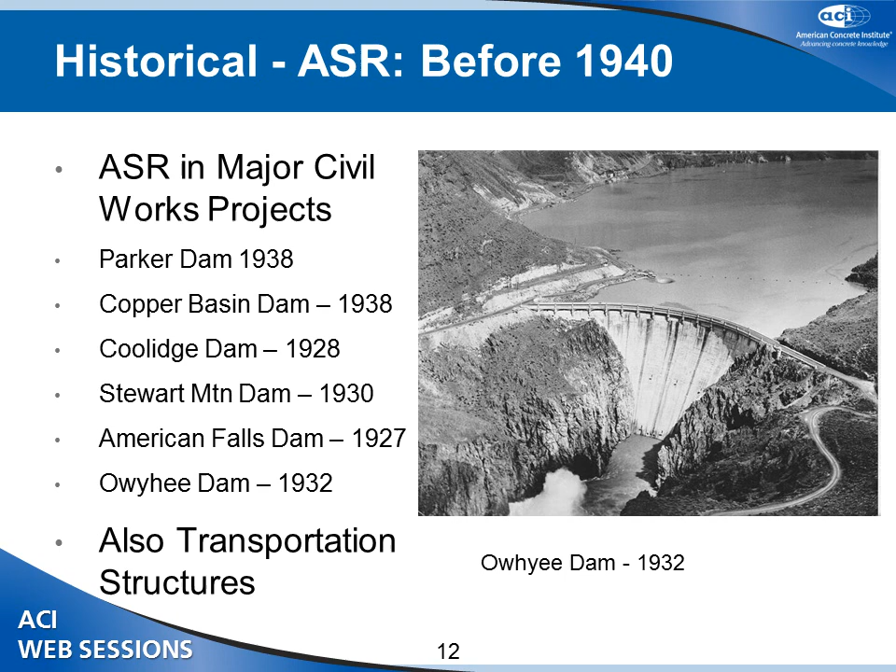Just a little bit of background. Jim Pierce is back there, and he's quite a bit older than I am, so he might have a little more perspective. These structures listed over here are mostly Bureau of Reclamation structures. A lot of public works in the 1920s and 30s turned out to have some kind of alkali-aggregate reaction, and also some transportation structures in those days. And people didn't understand it. As most of you who know about this subject know, Stanton published the first work on this in, I think, about 1940. And very quickly thereafter they identified alkalis in cement as a major feature.

If you look around the older literature, you'll find these kinds of graphs that show alkali content in cement and expansion. And interestingly, they all have sort of the same quality. It shows essentially no expansion up to about 0.4 alkali. Then they have a fairly steep ramp up to about 0.8 alkali. Then they kind of bend over. And a lot of them show this sort of very high alkali decline. Nobody ever makes anything out of that.

I first saw, well, given the size of the error bars, maybe that's just random error, but I've seen it on several other sets of data too, and I don't know if we need to make it. It's very rare for cement to have alkali contents higher than 1.2%, but it's kind of a curiosity.

But fairly quickly, the alkali content of cement became the major feature in the concept of mitigating alkali silica. We had some test methods in those days that you recognize if you work in this area because they're still there: the quick chemical method, the mortar-bar method, and the mortar-bar method modified for use with pyrex glass.

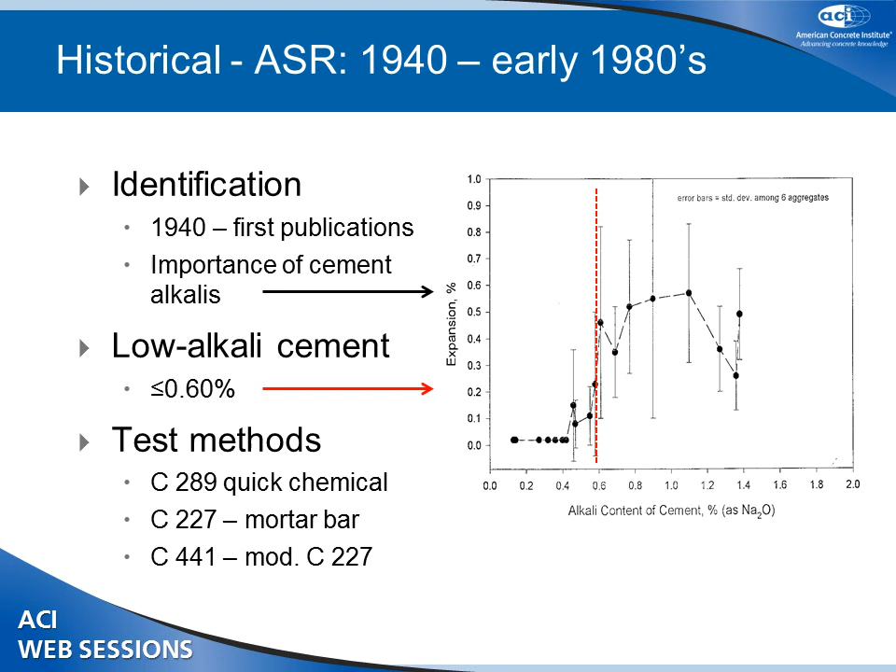In the 1980s, we used that guidance, low alkali cement. I remember when I first came to work for the Corps in 1980, and for a number of years thereafter, the rule was if you have low alkali cement, you don't worry about anything. You're covered. There's nothing else to do. And we built a lot of structures that way.

But looking in the older literature, people knew in the 1940s that pozzolans helped a lot. They also knew, as I showed in that graph, that low alkali cement wasn't always the answer. There's that business right in here. And we knew that. We just didn't implement it really. We just sort of saw the bigger part of this graph and went off and built the guidance around that.

And we paid some prices for that. I know the Corps has got some structures that are not doing too well these days that were built with that low alkali cement concept as the only variable.

So in the 1980s, improved test methods were developed. The now somewhat famous 1260 and 1293 and 1567 were all developed, I think, in the late 80s, and they were standardized in ASTM in the 90s and early 2000s. I think they're in the Canadian guidance a little earlier than that. We've had field service records around for a long time, and they've normally been held to be the gold standard, and I'll talk about that in a minute.

And now we are really moving along. We're developing a comprehensive concrete specification. One's already been put into the AASHTO literature through some federal highway work. And ASTM is working on a similar document. Our friend Jason Ideker is sitting down here, and he's chairing the group in ASTM that's working on that. And these things contain a lot of information and are really nice documents that are coming along.

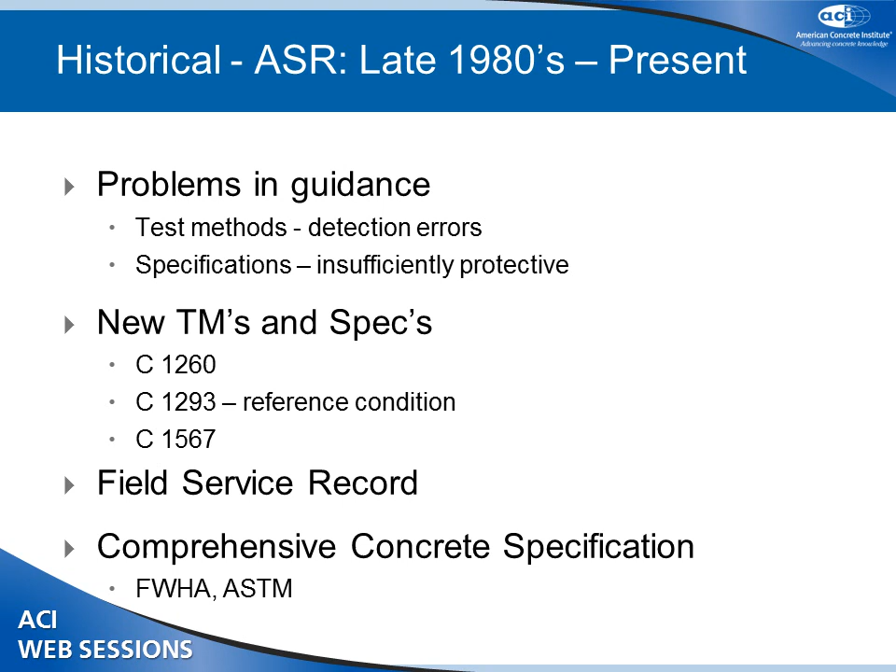And what maybe is coming new is this whole business. We used low alkali cement as sort of the reference condition for many years. And as I'll say in a minute, but I'll say it now and then say it again, right now we think that the concrete prism test, the 1293 test, is sort of our reference condition.

And nowadays people are doing things like taking big chunks of concrete and putting them outside. We've got some in Central Texas. The University of Texas has one, and I know Texas DOT is starting up some of this same kind of work. And there's some in Canada, and some in England, and there are various around. And this may, in the long run, be very helpful to us. I think it's already giving a lot of good data that'll help us make some progress on things that we have been either ignorant of or confused about.

Here's where I think one of the problems is: if you read all the information that's been developed in the last few years, you'll see quite a lot of detail and understanding there. In practice, however, it's rather common to just ignore all of that and run a 1260 test. If it doesn't do well, throw some fly ash or slag in and run the 1567, and if it meets the limit, you go. So many people skip what we consider the standard condition, which is the 1293, mostly just skip around that.

And in fact, sometimes we skip that one too, and we just go straight here. And in many applications, that tends to be the approach. And so the alkalis have been de-emphasized. We mostly rely on supplemental cementing materials, and people differ a little bit in how they use it. There's less than a tenth or less than or equal to a tenth, some differences there.

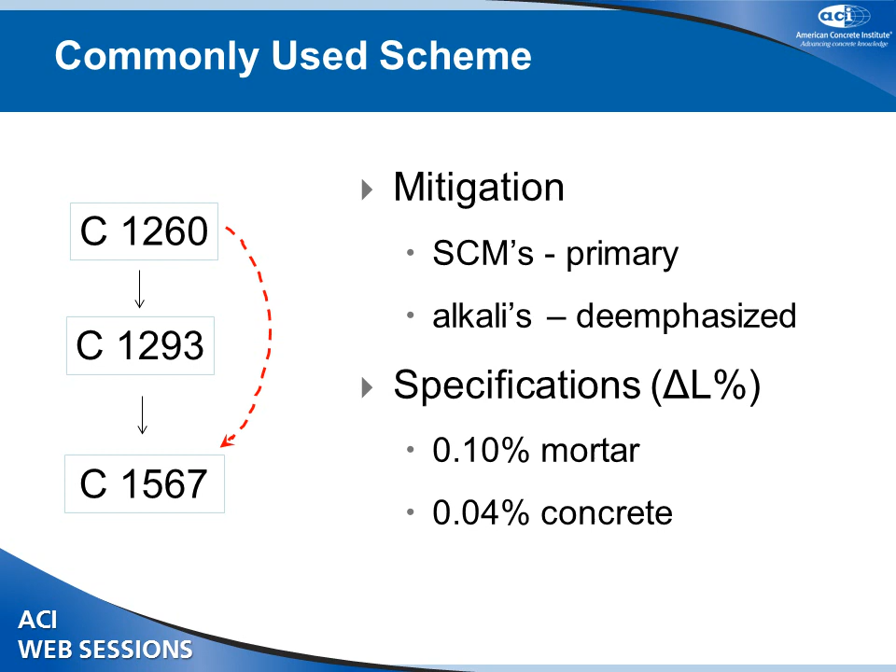Alkali-carbonate reaction has been a little bit of a neglected child, and that's because it's not as abundant, as common as alkali-silica reaction. It was identified in the 50s and 60s, and a couple of test methods have been put together, and there's been sporadic work on the mechanism over the years. And lately there seems to be a little bit more of a renewed interest.

This one has caused the Corps of Engineers quite a bit of problem in recent years. And I may end up talking about that a little bit, but I think later on I've got a slide on that. Some things I think that we don't get. Let me talk about field service record first.

C-33 has in the appendix a discussion on field service records, and it's about 10 years at least, and that the materials are the same and the conditions are the same. And people quite often, when they're developing specifications and test methods, tend to say, oh, what's it doing in the field? What's it doing in the field? That's always what they want to throw up as the reference condition.

And the problem is that it's very rare that we can really use field service records. The conditions are variable always. The materials tend to be variable. Cements tend to not be quite what they were yesterday, maybe not even the same source of cement. Age is sometimes a problem. And the biggest problem is lack of records, really. We run into structures all the time that are going bad. Something went wrong when they put it together, and nobody has any records on it.

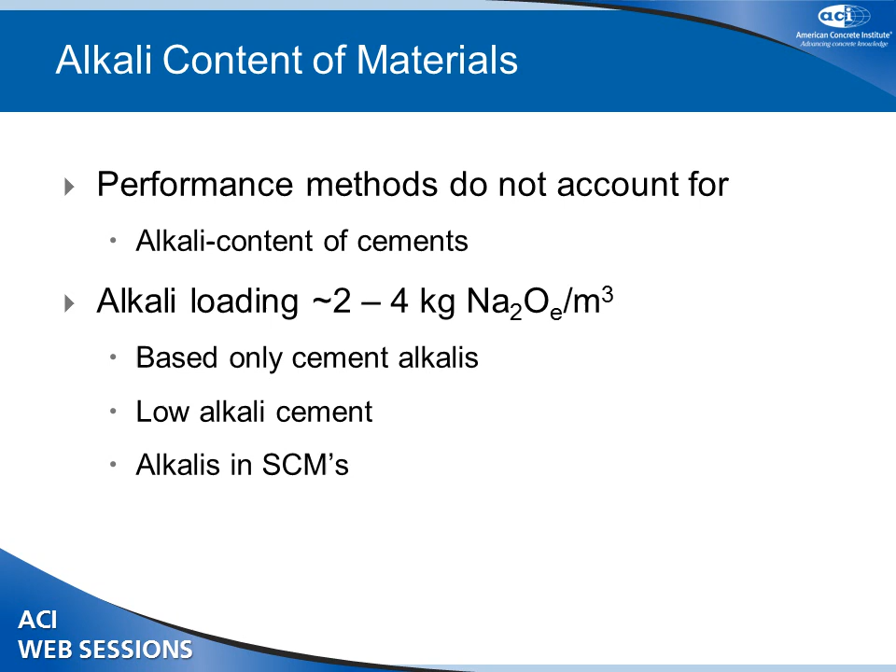So I think we've got a little bit of a problem there, in working with what is the central feature of ASR, which is the alkali content of the cementitious materials. There was a little bit of a glitch there for some materials. For others, it's fine. Plain old Portland cement with supplemental cementing materials, we're doing fine on that. This one is just kind of an arcane situation.

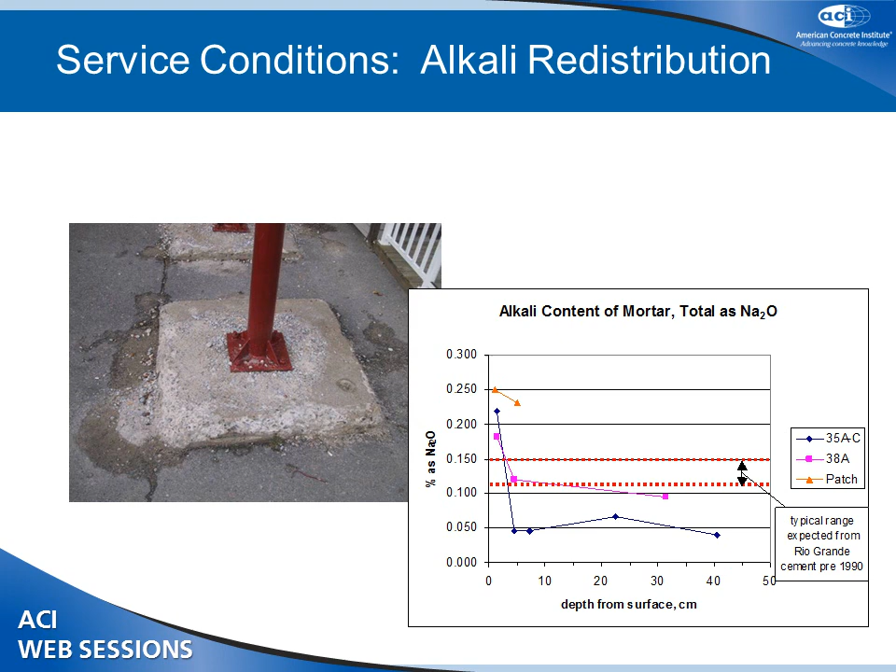This is one that I've come upon recently that's kind of interesting to me. It really has to do with temperatures. We've known for a long time, of course, that alkali-aggregate reaction is accelerated with temperature; that was the basis of our accelerated methods. And I'd always thought that the degree of the difference between two terrestrial environments would not be a big enough temperature difference that it would be something that would show up in our work.

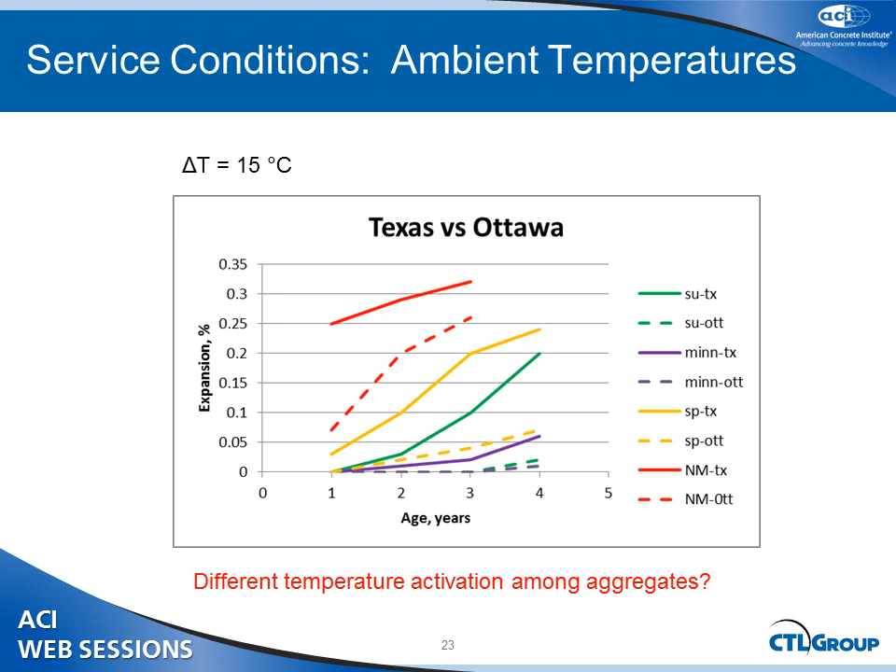Long-term projections, this is a big problem I think we have. We don't really know very much about it if somebody says I want a 50-year service life. For the longest time I thought that when we did an accelerated test method, this basically got all of the reaction out of the mix we were looking at. And if it didn't exceed a cracking threshold at that point, then we were home free for whatever reasonable service life you might want to get.

But if you look in Texas, where the temperatures are quite a bit warmer, and use those same activation energies, they're telling us that these test methods aren't translating into field conditions all that far out. And if that's true, I'm kind of holding, but if it's true, then that's a detail I think might be important. I was working on some of these things, and I know the guys in Texas that have been doing this work have got these blocks, and they're the ones that generated the data.

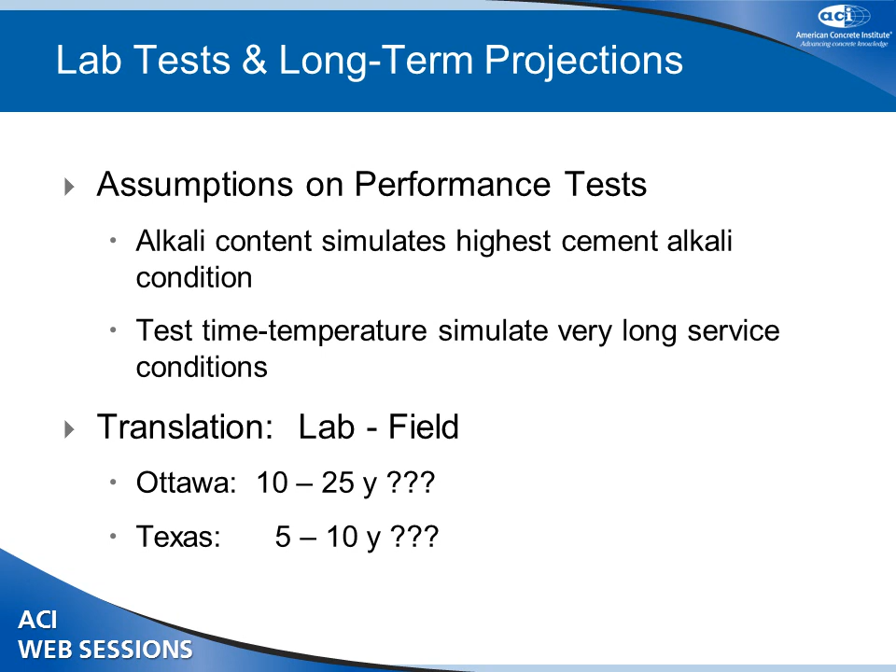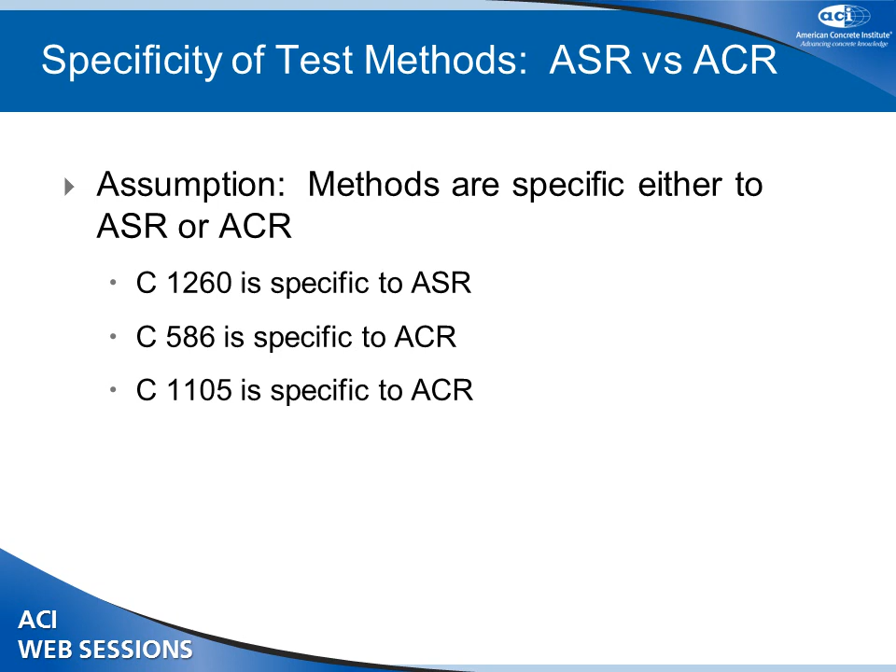So I'm not so sure about this specificity that we see in the 1260 being specific to ASR. There it is commonly held that when you crush the aggregate, it won't expand in 1260. And that may be true, but I'm not exactly sure. I haven't seen the reference on that. But anyway, so we have those kind of things.

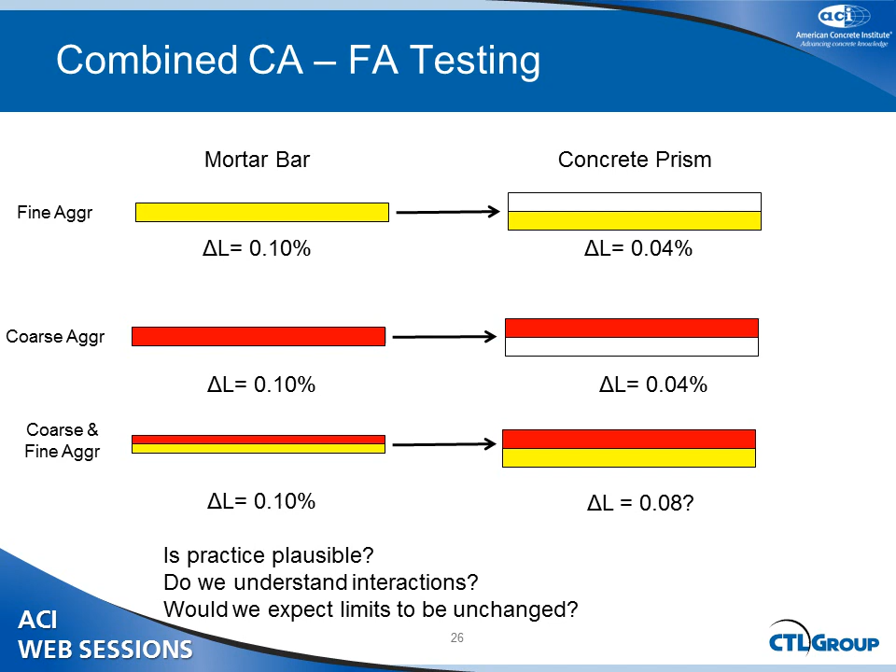Is it reasonable to think that expansion would still be 0.04? Or would it be double? Or maybe it would be less. I think aggregate interactions might be funny things. And I'm pretty sure we don't know much about that, don't understand much about that. But to just run off and do this and say, oh, it didn't expand beyond 0.10, I think is ignoring a lot. So I think that might be a practice that we've tried to put the clamps on, but people just do it anyway. So that's one.

And let me stop. One of the things I really would like to do is to spend more time figuring out what we've got in the ground and what went into it. And if I had a way of getting information, I would like to get serious history. I know we've got some. I heard some on some nuclear reactors the other day that had some ASR problems. I bet you they've got all the as-builts on that. Now, whether they would release those as-builts, I'm pretty sure they probably wouldn't just because of the public issues associated. I know there's one plant that's being considered for relicensing, and there's a big issue of the ASR.